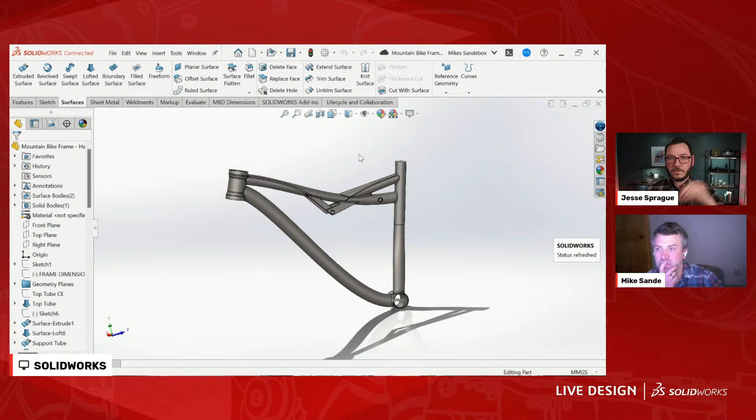Especially with surfacing, right? I think, and maybe this is how you ended up going down this path, but I think people are initially scared of surfacing because it sounds so much different than what you're normally doing. It was always one of my favorite topics to teach about though, because it's like it lets you speak the language of SolidWorks. But with that complexity, that ability to get into the nitty gritties, you have to be a little more intentional. And maybe that's how you got to where you're going today, but having a good plan coming in I think is extra important when you get into complex stuff like this.

Totally. And I think one thing I was thinking about is, have you ever designed something a little bit more complex than you're used to, and then decide to start over, and that second attempt is always exponentially more intelligent? Does that ring a bell? Probably every model I make, I get to the end and I'm like, man, I should have done that differently. But hindsight's 20/20, right? A lot of times, especially if you're designing something yourself, you don't necessarily know where you're going to go, and SOLIDWORKS is very good about adjusting. It's like, okay, I should have started this in a totally different manner. Yeah, totally, so we'll do that today. And this is what I've got up here is a frame.

I did this, man, I don't even know, years and years ago. We can look at the feature properties, 2017. So this is an old model. It's when I had a lot more time to spend in CAD.

This is actually, we were just talking about it, ordering things and watching videos. I had bought a new bike frame to build, and while I was waiting for my frame to come, to be excited about it, I decided to design that frame. The problem is, this is not specific to the bike industry, but when a bike is designed, they design around a lot of constraints.

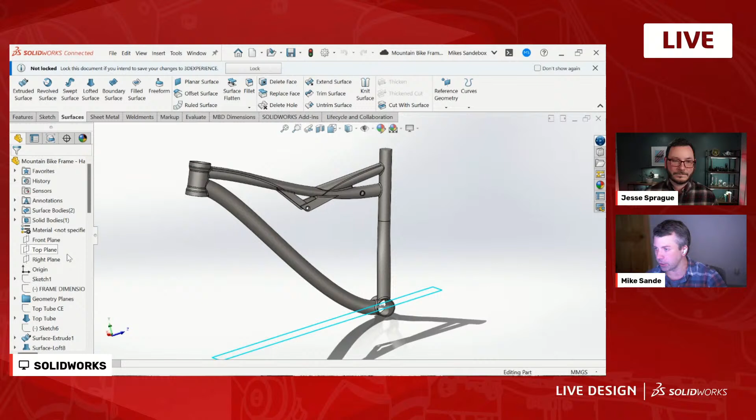Specifically, I'll pull up an example of a spec here. You have the fit of a bike, and the fit of a bike is what makes or breaks a different type of bike. So a road bike versus a downhill mountain bike versus a BMX bike, obviously they all look different. But even if you look in mountain bikes, for instance, which is what I do a lot of mountain biking, they all have tweaks to their geometry.

Let me grab some reference images. So a cross country race bike is going to have a couple angles different on just how the fork is positioned, and that 2, 3, 4 degrees difference there, they call that slack, and that's going to modify how the bike rides. So what you'll see in this industry is they'll take a bike frame, they'll design it for cross country racing, but then they'll want to have an option for people who are more into leisure trail riding or do more downhill, and they'll add slack to it, a little more travel in the suspension.

So they need to have a model that's super intelligent that can abide by these changes. So let's just kind of look at what the geometry is, and I'll open this up. They spec these things, and when you buy a bike and you're comparing them, you'll spend a lot of time just looking at what these properties are.

So like the slack angle, right? You've got these, just some of the basic specs. Let's see, I can't really move around. Yeah, so reach, stack, seat tube, head angle, seat angle, head tube, chainstay, wheelbase, standover. All of these dimensions are critical dimensions when designing a bike. Yeah, it's pretty complicated.

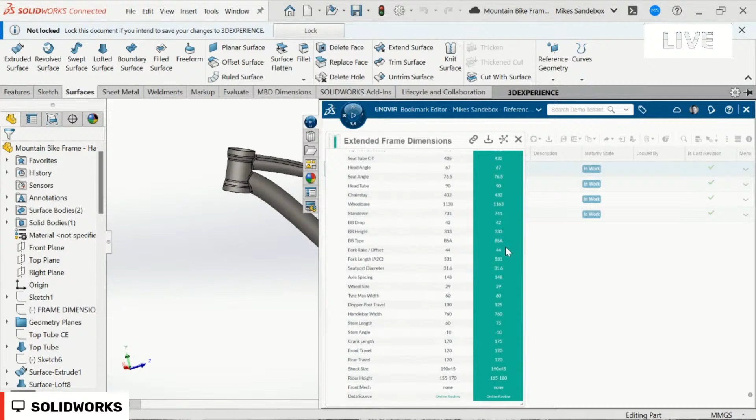So is that mostly just for like riding? I actually don't know that much about frame design, but I've always been kind of curious about it. Is that just like for riding dynamics, like with the motorcycle and stuff?

It's the same kind of idea, right? You've got different rake angles and things like that that kind of define what the bike is for. I would assume that's pretty much exactly the same here.

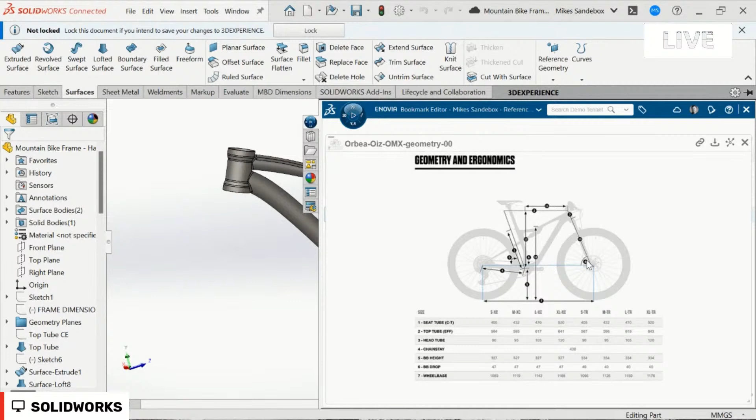Yeah, so a cross country bike's going to have less slack in the front head tube, which is this angle here. The reason is, as I'm racing, I want the most efficiency I can get, and I get to a hill to climb. If I have a really slack front, or a shallow front angle so it's more extended out, I'm going to be pedaling into my suspension. Even if you can lock it out, you still have a little bit of give, so you're losing energy as you do that.

So they'll modify that angle. The distance between where the crank position is, where you pedal, to where you're seated, that's going to change. Like a beach goer or a cruiser bike, the crank is way out front because you're sitting back, and it works different muscles. Generally, people riding those don't have the physique of an XC World Cup racer, right? They're not as strong in the hamstrings as they are in the quads.

So bike designers, of course, they're all designed around, all right, who's the rider? What's the intention? How do we get the most comfortable ride or the most efficient ride out of the geometry tweaks? So again, when they're designing these, you need to have those all in mind, which comes into the design intent. So going back to this one, I'll show you an example of what most of us, I'm pretty sure every SolidWorks user has run across, is like, hey, I created this really cool bike.

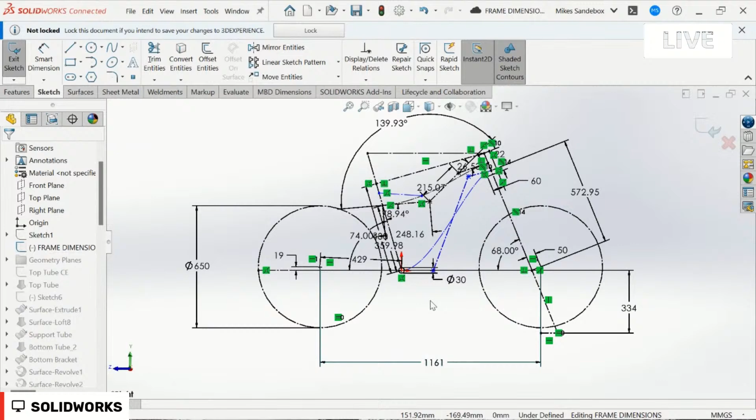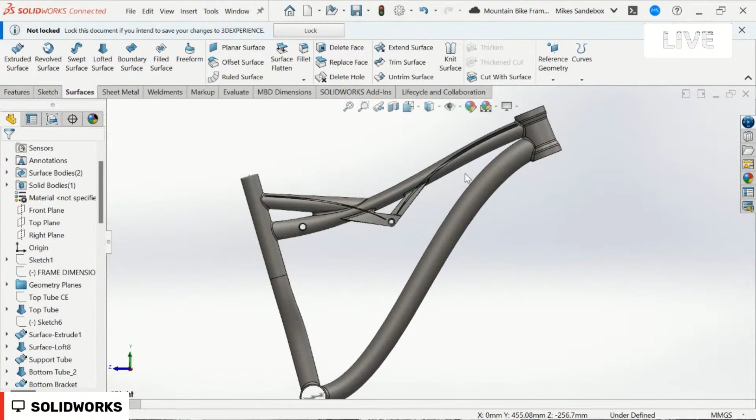What I did here, let's take a look at the sketch - this is kind of the master sketch. This drives everything, and that was my goal. Here's the 650 wheel, you can see the wheelbase - these are all pulled from the manufacturer's specs online, you can get these dimensions. I've got this style spline, we'll talk about this in a bit. What I wanted to do is say, let's tweak it, let's see if we can pull this out a little bit. Maybe that's the modification, and obviously when we exit, we want it to update. Great, that actually worked.

Maybe not as manufacturable, I don't know - we could dive in and talk more about that. And the example I wanted to give is actually to break this thing, so let's make a bigger change. Like changing the seat tube - we change that seat tube angle to be a little bit steeper. And there we go, that's the area we're probably all familiar with.

And quite the list too - a lot of fillets. Fillets are usually easy to repair. Split lines, this was cosmetic, but it's not the frame that I was looking for.

Going back to it, my intention was to create a large size frame and then modify the dimensions so I could create an extra small, a medium, a large, an extra large. And on top of that, make tweaks - if we're going to prototype this thing, go ride it and say that head angle is too steep, we don't want to have to start from the beginning in CAD.

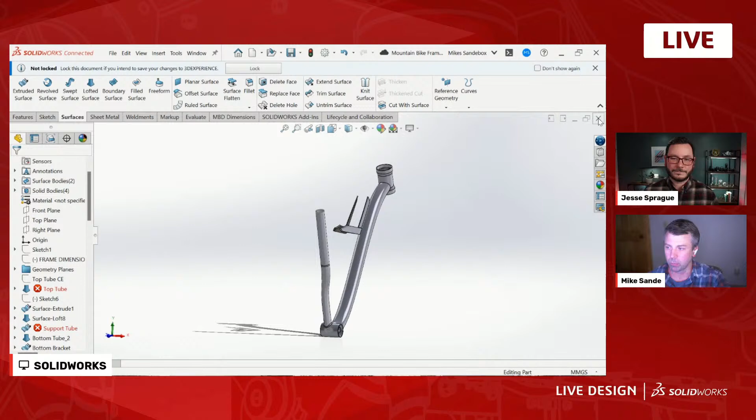Does that all make sense? Yeah, definitely. I think it's one of those things where if you think about things ahead of time - every model I go through, I get to the end and realize I should have done things differently to make my life easier. But there are definitely things, even when you're not sure where you're going, that you can think about ahead of time that will drive how you set things up, or allow you to set things up in a way that makes more sense. I always encourage people to do that - think ahead and see if there's something that will make your life easier, because there probably is in any scenario. It's worth taking that 10-30 seconds before sitting down and digging in.

It will probably save you hours if you just think about what it is you're actually trying to do here. It's hard to predict changes, but when you're in industry working more through a company, you'll get a better feel for what changes might occur. The bike frame example is like, hey, we need more slack on the front fork, so change that head tube.

So yeah, you'll be able to better understand what to expect, but that's not always the case. So really sitting down when you have a design project ahead of you - write out what are the risks your model might entail as this is going, what kind of design changes do you want to design for to build intelligence. Start with a basic model, even a scrap model - if I build this and this and this changes, does it blow up? You can use that as a baseline.

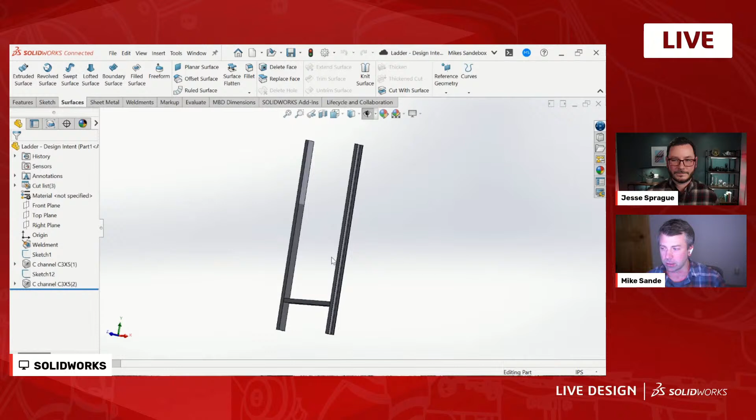A pattern, if we want to go from 8 to 6. One example I used to show, this was around 2015 or 2016, was the old ladder. Someone has a ladder, and there might be a change, or most likely we're going to have different products that come out with different ladder numbers. You'll see that I've got some design intent already built in.

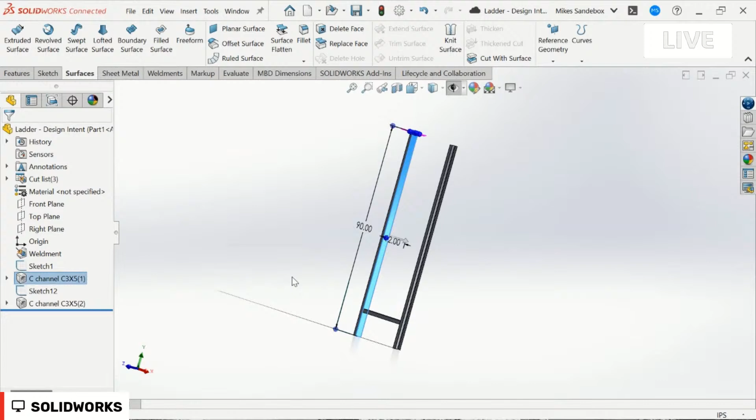This bottom rung is 12 inches from the base. We don't need to have it any smaller. We could probably go a little bit higher, depends on who you talk to, but 12 inches is a pretty good spot for that.

So like I was mentioning, we can go into features and create that linear pattern. This was brought in around 2016, where we can do up to a reference. Otherwise, this used to be something you'd have to create a bunch of global dimensions, name them, do some math inside here. This is really cool, an easy way to include some design intent.

So I'm going to create that vertex. I'll give this maybe an offset, since we also want that 12 inches from the other end. We'll space these at 12 inches.

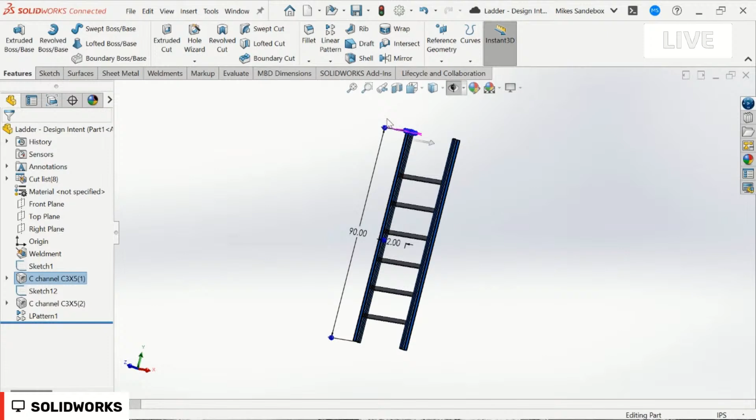So if I come back, let me just extend this out, and there's a request for a really long ladder, we can pull it. We see the design intent here is like, hey, I want a master model that can create any length of ladder. Super easy thing to model. I know we're going to get into much more complex examples, but I think that illustrates a great way to build in design intent into your designs.

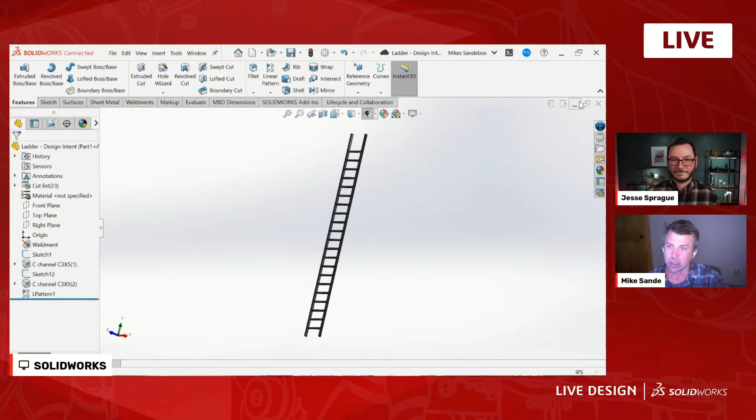Yeah, and I think design intent itself can be a little bit vague. Sometimes it's hard to explain what that means to somebody, because it can really impact any part of your model. It can be in your sketching or a part of a feature like you just showed, but it's really a mindset more than anything. It's just like, where can I take advantage of the tools that the software has to make it do what I want it to do?

Yeah, totally. Another area too is just using equations. So here what I've set up is that this thickness is just set to 0.2, and this is probably now that I look at it a bad example, but you can drive equations. If I double click here, we see all I do is enter the equal symbol.

You can click or manually select the nomenclature. If you're new to these, it's kind of worth learning. It's just the order D1, so for the first dimension on whatever sketch. This was the 6th sketch, I must have done a couple more. So a fresh new part, sketch 1, sketch 2, sketch 3 as you create them, and it just keeps numbering. That's all it is, just the first dimension that I added at the 6th sketch I created.

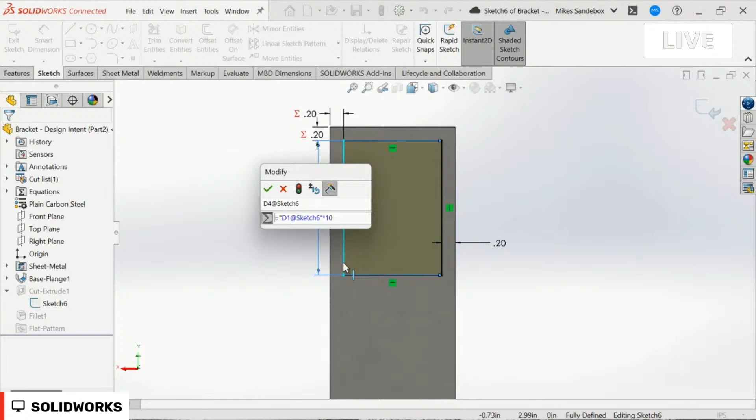So I guess I created a couple more for the basic extrude, but you can set those equal, and you'll notice I just have a multiplier of 10. Again, this is just for an example here. So if we go to 0.3, you'll see that's going to drive this length, and it also drives these other dimensions. So again, some design intent here, just into a single sketch.

And another cool one here is linking to global variables in sheet metal. Whenever you create a sheet metal part, thickness is automatically defined. Notice this radius here, it's at 0.13, 0.125, looking at the lower right there. If I come back into my base flange, we'll edit this feature and we'll override these.

We'll go to like a 1/2 inch or a 1/4 inch, whatever. 0.25. And click OK. That goes.

And then you'll see now we have... hey, that didn't update. Might be because I overrid it. That link to thickness can modify it too. So again, just ways to be aware of what might change down the road.

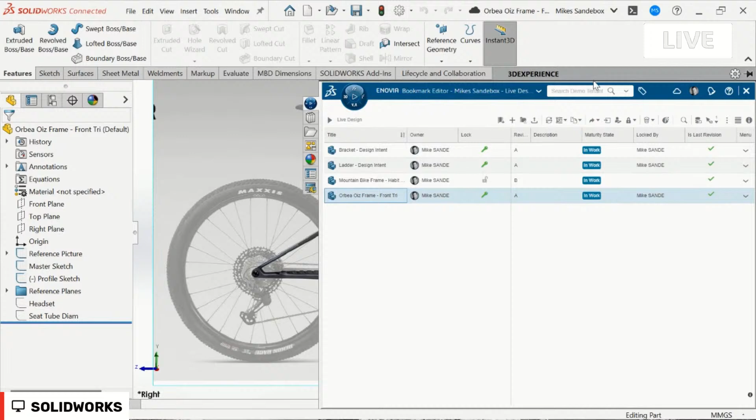Have a plan, really. I like those couple examples too, because I think sometimes people have a tendency, myself included, when working through these things, to say I don't have time for this, I'll just punch in a number. But those couple examples are literally point and click. It barely takes any more time to set up that equation or link to a global variable than it might be faster even than typing in a value. So it's not something that's got to drag down your workflow to try to work all that smarts into it. It's almost comparable in time sometimes.

Yeah, totally. Spot on. All right, let's see. Anything come from the chat?

I see we've got Eric making fun of me for my 10-30 seconds, which he reduced to 1/3, which is a funny joke. I meant 10 to 30 seconds, it was a range of time, Eric. Thank you very much. Hi Eric, good to see you as always. I like that. I saw Joy is on the call as well. I always get nervous when Joy's on the call because she's an expert in all things. It's like, got to watch my words. That's why we love Joy.

Cool, so yeah, thanks for joining as we go along. If you guys have questions, or even more so, there's a lot of experts in the chat, share your experiences. I'm by no means... I don't work in this industry, I work in the CAD industry, I don't work in the bike industry. I've spent a lot of time with bike manufacturers, helping them out and learning from them. But yeah, share your experiences and my points, because it's super important that we take that opportunity.

All right, should we try to design a bike frame? Let's do it. So disclaimer, I was going to redo the old frame that I've already done once, because when you do a model again it's always better and more robust. And then I decided it'd be more fun to do a bike that I want, and I started doing this. I'm like, this is a little bit more complicated. So I actually have not gone through this other than to where I'm at today, so we'll be doing this together. I make no promises, this may not go well, but hey, that's live design, right? This is the life we live.

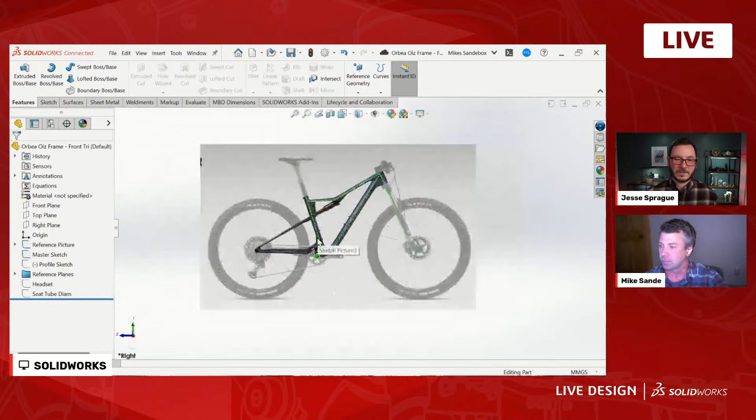Honestly, I think that was my favorite class to teach, because surfacing is one of those things that people get nervous about, but I always tell people, just open up the surfacing tab and look at it. You'll recognize more of the tools than you won't recognize, right? That first bank of tools are all the same thing, you're just working on faces instead of full features or whatever.

And I always like the analogy of, you're speaking the language of SolidWorks. When you're doing surfacing, you're just doing what it's normally automating for you. It's like writing a sentence with words, and surfacing would be like using the alphabet to spell, you have a finer... You and I are terrible spellers, so maybe that's not a good analogy, but it breaks down somewhere.

It's left to right, just like everything else—most commonly used things to the least commonly used things in the command manager. Once I realized that's how SolidWorks is set up, I figured I'd always start on the left side if it's new to me, since those are probably the tools I need to figure out first.

So all I did here, I created a sketch picture. It's just insert sketch, use its tools, sketch picture, and then get that to size.

Even though this is from the manufacturer's website, in production environments this would come from ID. This is going to be a hand sketch that the industrial design department comes in and slaps over. Engineering is going to have some baseline dimensions to start working from, whether it's an existing frame or feedback from a mule—their prototype version out there with pro riders. They'll kind of have a start.

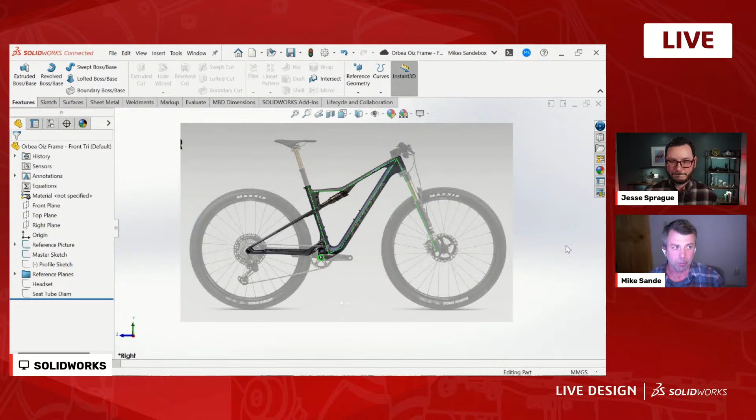So I'm not cheating here by having this image. It would generally come from ID if it's a completely net new product line or part number. Once I have this in here, and again it's been scaled to size, this is really where, when we talk about setting up the model and being smart with it, you spend a lot of time on that master sketch.

So what I've basically done is used somewhat of a center line. It's not a true center line—this here is really based on some of the geometry conditions, like there's a kind of hard edge on this particular frame. I want to make sure I'm meeting that when I start creating the surface geometry.

I actually spent a lot of time looking at the geometry and trying to figure out how I'm going to go about this—where do I want to start? Simple, I always start with simple areas, and then where do I want to have the more complicated sections at the end of my tree. That's a lot of where the frame is meeting up with other parts.

So for this front triangle, it really consists of a couple key things. Down here, this is the bottom bracket—this is the bearing housing where your crank goes through, and all your power is transmitted. That's super important, and that's where I put it right at the origin. Everything around the bike design is going to be based on that.

The other thing you'll notice is that I have a line here to accommodate the position and angle of the headset—this is where your handlebars go. Again, that design there is critical. It depends on how much reach there's going to be, how high it is, how much slack is in the geometry.

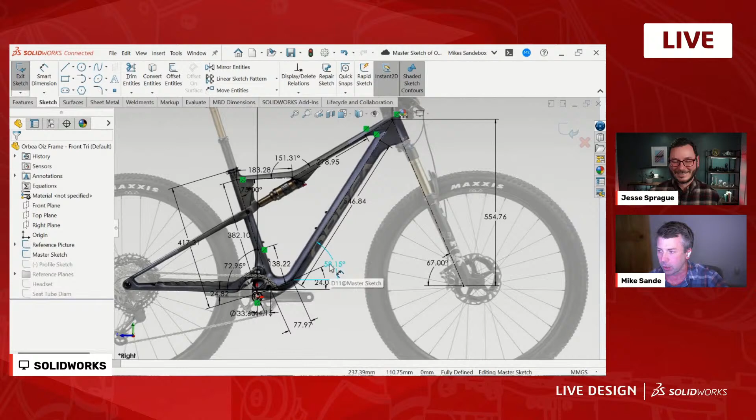Not to be that extreme, but so in here you start to lay these out, and really what I'm looking at are what dimensions I'm going to modify and change. You'll notice this thing is fully defined. I do want to make sure it's fully defined, but that doesn't always mean just slapping a dimension on everything until it's black.

I think a great example is if we start to play with my plan - what if the positioning of the rear suspension changes, maybe we go to 140 millimeters of travel versus 100, or 160 versus 140, or 120, whatever it is. They want to extend that suspension up. Can I adjust that without having any problems?

And here we see that probably would be bad, because all of a sudden we're moving where the head tube position actually is, and we want that set to this 143 dimension. So it's moving it down - not ideal.

So that's like, all right, cool - let's kill a dimension that's maybe driving that and redimension this angle accordingly. Here's a nice little trick - grab my dimension tool, and I can actually set an angle by selecting the line and then the vertex, and you get this little triad that pops up. Love that. I'm going to set that here - 30.7 or whatever. I'm not worried about those values right now.

So then come back and test it - does this give you better behavior? It's looking better. It's still got some movement, but it's not as dramatic, right? So it's kind of just spending a lot of time in 2D, especially if it's a master sketch that's driving the intelligence.

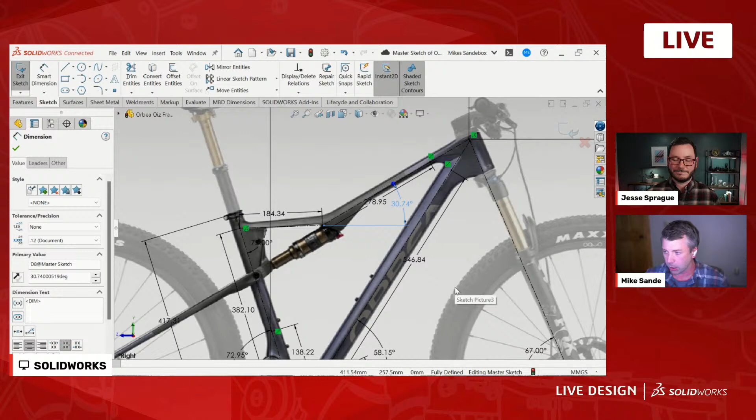So you spend a good chunk of time here, really looking at the likelihood of a seat tube change. This is probably one I've got to work on as well, because that whole thing is shifting, so I'll probably come back and refine and look at the dimensions.

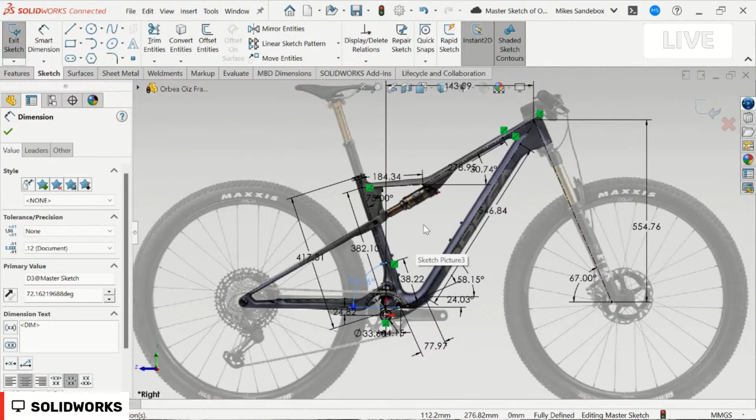I like your concept of, if it's black, it's fully defined. Yes, it is, but it may not be defined the way you want it to be. Just putting a dimension on it doesn't mean it's going to do what you want it to do. I like that concept - yeah, it's super important.

So spend good time here right up front on that 2D model, moving stuff around. If it doesn't look good, make the change. I'm going to leave it as here since we're stuck on time and keep moving forward, but you can see right away I'm setting myself up to probably not be successful if my goal is to refine these things. Maybe in this model, if we put a little more seat tube angle to it, that's fine to tilt it up - maybe there are some allowances there. Those will really come down to your design intent.

Another thing I do too that I use a lot is being able to color sketches. It's kind of just an easy thing to stay organized, but setting up sketch color, you can just right click on the sketch itself, goes into here. I did something bright for live design, but I do this personally to give that contrast. It looks really nice.

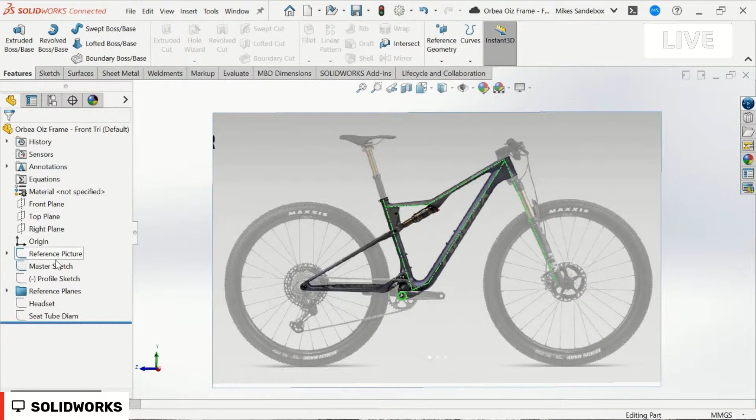All right, so we have kind of this master sketch, and again, I'm going to try to leverage and always focus on the master sketch when I create features. Now, what I did in this model that's a little additional is I've created the master, and then I've gone through and started to create this profile sketch. What you can see here is really this is going to help me determine where and how thick some of these tube components are from the profile.

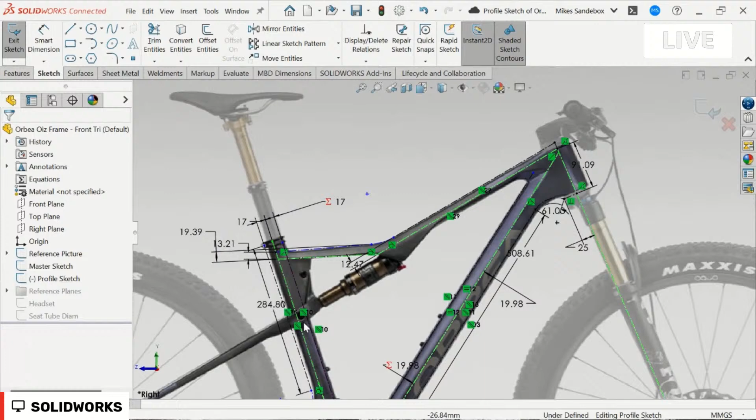Some of these are definitely like we know the values. The seat tube diameter, the outer diameter, is 34 millimeters at 31.8 millimeters ID. So I set those, and here's an equation, right? Both sides are equal. But just kind of giving me a reference based on that. A lot of these other ones, 19.98. So this is kind of a true center line. I've just got those tied. You could also just mirror that over, but for the sake of just creating this kind of outline, and you'll see where that comes into play.

On the top one here, I only created the top profile. It's not fully defined. Not a big deal. I'm using this as purely reference, and if I use it for anything, I'll make sure that I go back and fully define this accordingly. So yeah, this is just something I've added to this workflow, is like, all right, well, I'm creating some sketches, I might as well build it out.

So when we look at it without the image, let's just do, I'll show those in a sec. We'll hide the reference picture. Let's show the profile sketch. And here we can start to see, all right, here's the geometry. This is what we're going for. It looks pretty good.

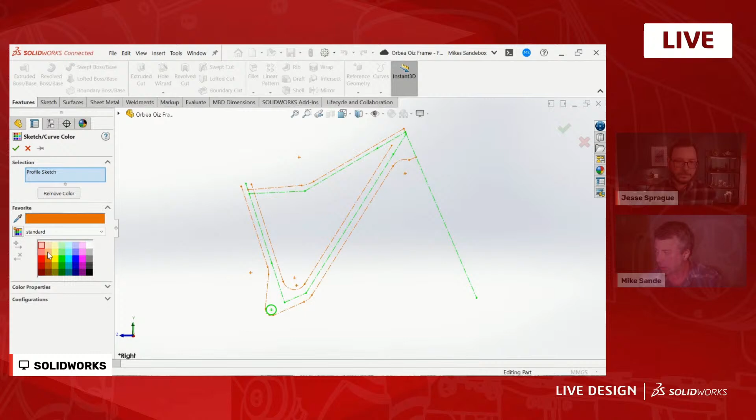Yeah, and that's a great point too. It's okay to pencil things in sometimes, right? If you're not sure about exactly what it's going to do, you can pencil things in. Just go back and lock it down if you're going to use it. At some point, define it. Make sure you're defining the things that need to be defined. But it's okay to be a little bit fluid as you go through a process. And if you're doing something that's just kind of there for a visual reference, use those sketch colors and say like, hey, don't use this at all. If you're going to end up using this for something, we need to make sure there's more intelligence. So you can kind of flag it with those colors, which is, to me, a nice visual cue.

That's a great point. All right, so we kind of have the layout done to it. Again, probably not going to get me to my desired result. I'm going to go back and I want to finish this model and make it super intelligent. Just not going to happen in the next, what do we got, half hour.

So then once we get this section here, it really comes into setting up where we're going to create the cross sections of each element. There's a few spots that are super simple: creating the revolve around where the headset's going to go, creating the diameter where the seat tube's going to go, and also the other one is going to be the bore of where the bottom bracket goes.

The reason that these are simple, this is industry standard, kind of. Most mountain bikes are going to have a pretty much set bearing size and type of headset. There's a bunch of, historically speaking, there's been a bunch that have come out. Road bikes, mountain bikes, all have different ones.

For the most part, when speccing this, we know what kind of headset we're going to get—seat tube 31.8 or 30.6, there's basically two standard diameters, and I think everyone is at that 31.8 or whatever. Bottom bracket is the same thing. So I start there and begin creating that profile, and we'll start to create those sketches.

But the next spot I want to hit is the reference planes. To start defining the easy spots like the seat tube and head tube, we'll add those in a sec. I also want start and end profiles for each tubing element—we'll create one here, one here, one here. Once we have the three main forms of the triangle plus the headset spot, we'll come back and refine the joints, because that's where about 80% of the work really comes into play.

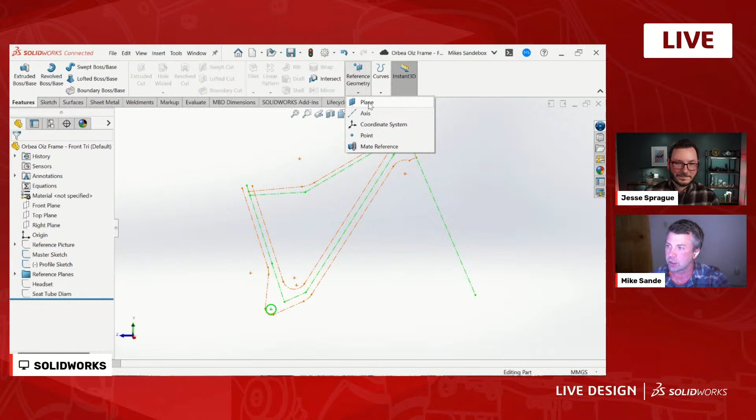When you create reference geometry, I always want these based on that master sketch. You'll notice I've added in a couple little nodes, like here—let me go back and show you a little better. And you did that with split entities? Yeah. In fact this one could be moved a little more, to where we're going to have a little more complexity in it.

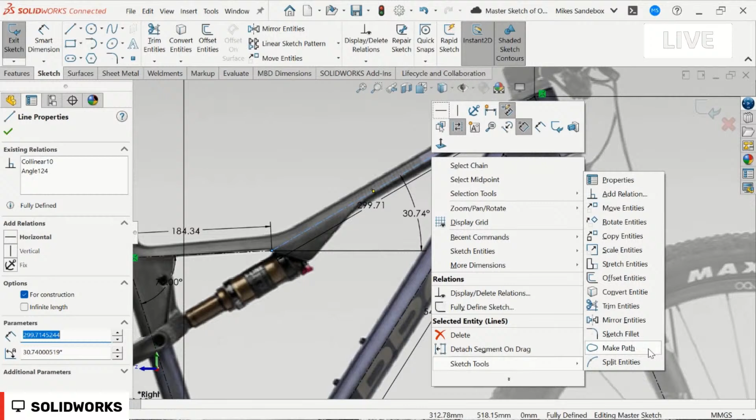So if you sketch something out, instead of adding a line or resizing it, you can come into the sketch tools—I get it from the right click menu—and near the bottom there's split entities. So split entities, and you can just pop that in. That one's really nice, and I'll show you another one with style splines as well as we get there.

So I've added that in here, and the reason is that gives me where I want to create some reference planes. What I can do is select on my line, select on my point, and right away that creates a perfect normal-to plane on that line. What's great is as we modify that master sketch, that plane always stays right there, normal to it.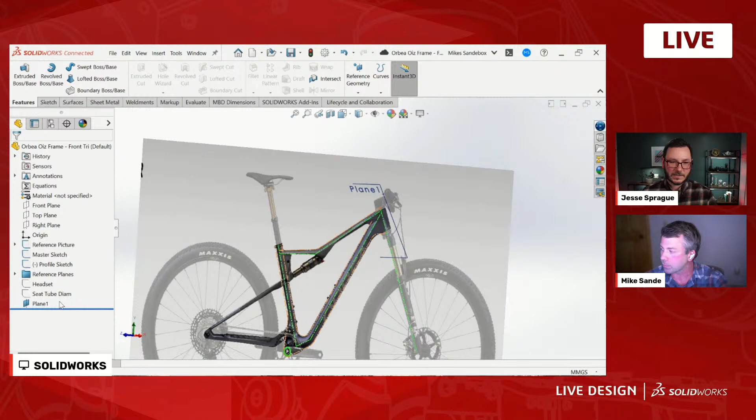It's also nice that when we go through and look at this plane and create a sketch on it, that little coordinate system pops in there nicely parked right where it's defined. So I know where that relation, the 0,0 point for that sketch, is going to be based on that master sketch. That's a great tip—you wouldn't suspect you could do that unless somebody told you. It's a really easy way to control especially the normal direction of a plane.

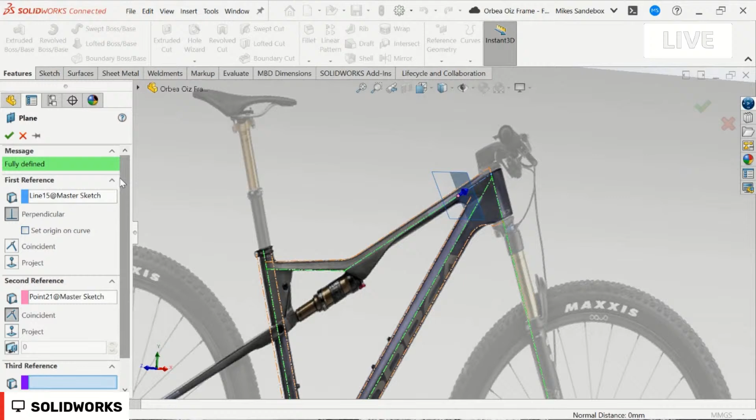I did learn this going back—the size of the plane created has some sort of equation based on the dimension, so this one's a lot smaller, the length of the line in this case, which I thought was interesting. Then once you set up your planes, you can flip normal—you can flip the normal around on these. That's basically the default it considers normal when it goes to the view and how it's sketching. So whoever knows why that was added, put it in the chat—I don't remember.

2019, that'd be my guess. I don't know, that's my guess. All right, somebody drop it in the chat to correct us. Flip normal, when was that added?

All right, go through and set them up. You can size these too, so obviously sizing the plane so it's not a complete disaster. And then naming, I name everything, I try to name everything. Good habit, so getting these named, giving it like, what is the down tube top, down tube bottom? This is the top of the down tube, this is the bottom of the down tube, seat tube as well. And then you have these name references, they're easy to follow. If you're not naming things, well, you're crazy.

That's going to be the clip for this episode: if you're not naming things, you're crazy.

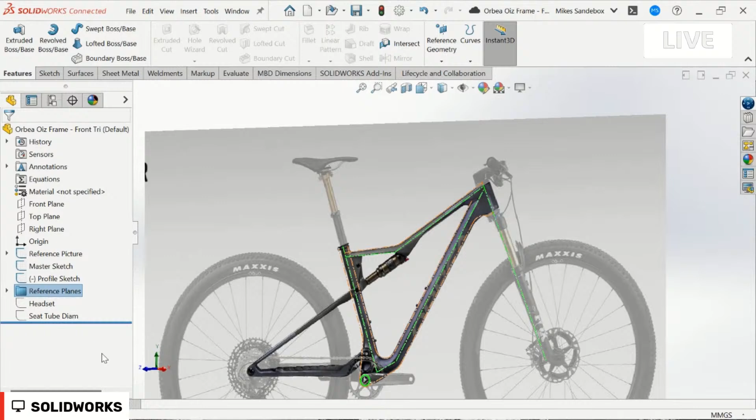We got some clarification on F8, it's the display pane, that's why that popped out when you hit it. Gotcha, you can display pane, quick access. Okay so it is working in my version, it is working properly. All right, thank you, that makes sense, that is good to know actually.

All right, so I've got a bunch of organizational things. Again, just going back, spend more time than you think on that master sketch, that initial sketch, if it's going to be the intelligence, right? And oftentimes that stacks up over time. To me, I think I often just jump in and create a sketch, fully dimension it, and move on without really questioning why and how. Totally, people who work in industry for a long time obviously know this, they practice it, they understand it. So for newer designers, the 2D sketch you create has a lot of implications. Make sure you understand them. And if you don't, go ask someone who might, or figure out, write it down. Like, what are the risks that this model might have?

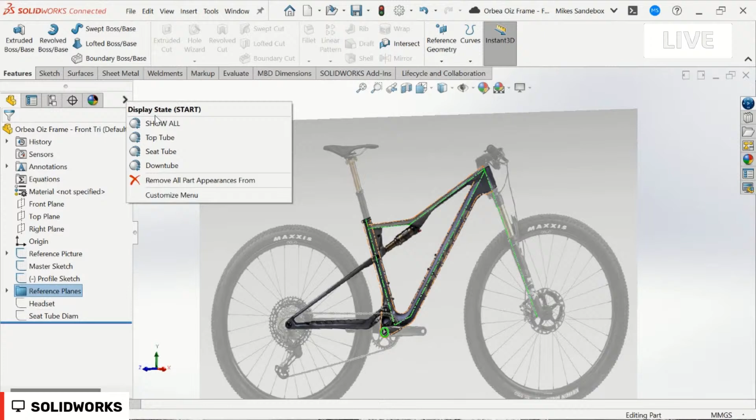And then from there, in this particular design, I start creating those reference planes to be able to build it. And then I love display states, so I'll come through and create a bunch of display states that allow me to hide and show. What I do, I actually never go to the configurations tab for this, it's a good trick. This little chevron, if you right click on it, this is where you can access your display states on the fly. So a show all brings everything in. My seat tube hides out that sketch, gives me the master and just the plane I need for it. Super handy to me.

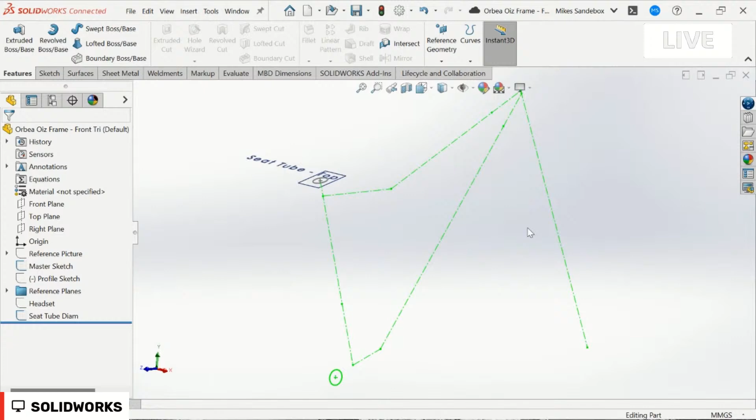Yeah, display states that are not linked to configurations. Yes, so you can link display states, I'm not using configurations yet, we essentially would, but... and these are nice for design reviews as well, using display states. So if you're hiding a bunch of stuff, you've got different appearances you want to apply to things to point out during a design review, you can create a bunch of those. Like a customer comes in, they want to see their products, just going through display states to show that is a nice way to do a presentation as well.

Yeah, that's definitely probably an underutilized tool in SolidWorks. I don't know what else people use display states for. Showing a cheese appearance versus, yep, probably, I don't know why I thought of that. Guess I'm hungry, Wisconsin's coming through.

All right, let's add some geometry. So like I said, we're going to start easy, and this is all going to be surfacing. We'll start surfacing, and eventually we'll get to some solids. If you're new to surfacing, and if you don't see it, right click and go to your tabs, and you can see all of the cool tools that are available. These are all, doesn't matter what version of SolidWorks you get, you're going to have feature sketch, surfaces, sheet metal, structure systems, and so on.

All inside of here: lifecycle and collaboration. I'm working in the new connected version of SolidWorks, saving to the cloud and managing all my revisions and content there, which is super nice because I work on multiple computers and can hand it off.

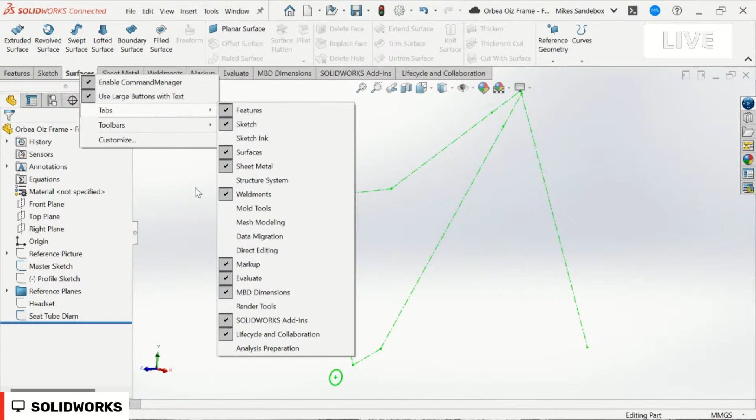I love how easy it is to pop those on and off. I'll do that on a project by project basis, swapping my command manager around to just have the tools I need there. I know you can use the scroll wheel to get across tabs, but it's nice to narrow it down to just the tools you're using, even within the phase of a model.

When I was doing a lot more CAD work, I had reg keys for kind of everything. I had a reg key for weldments, and surfacing was the big one. Simulation was another I would switch to, and then I had my default. I'd load my surfacing reg key, which would change a lot of my mouse gestures and my S key. Simulation pre-processing was a lot different too, so I'd load that reg key.

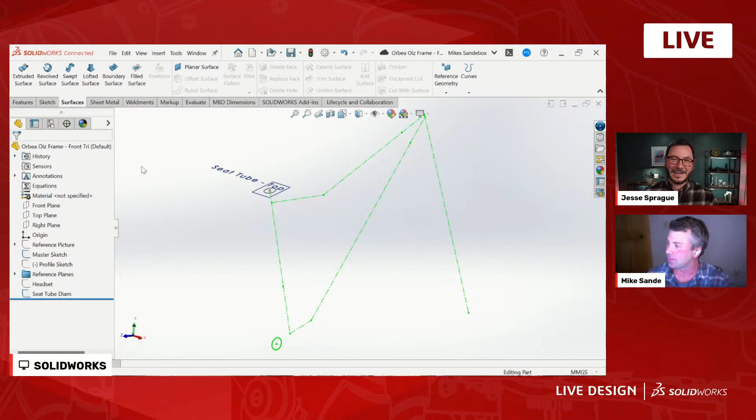That's trickier than I got, but I like your style, Sande. I think it was effective—more like, check this out, look what I got. You never did anything all day long, just calling people over to your desk, swapping reg files. I have 37 new reg system settings now. You never know what I'm going to do.

Going in, create an extrude just like you normally would with basic features. An extrude surface is just like an extrude, but it's just the outside shell, and it's infinitely thin—we can later convert those to a thicker model. Again, that's design intent. One area I think is important to learn is there are different ways to create different end conditions when you create 3D geometry. In this case, up to vertex—you don't even have to select it from the drop-down, it's smart. If I click on a point, it understands that vertex.

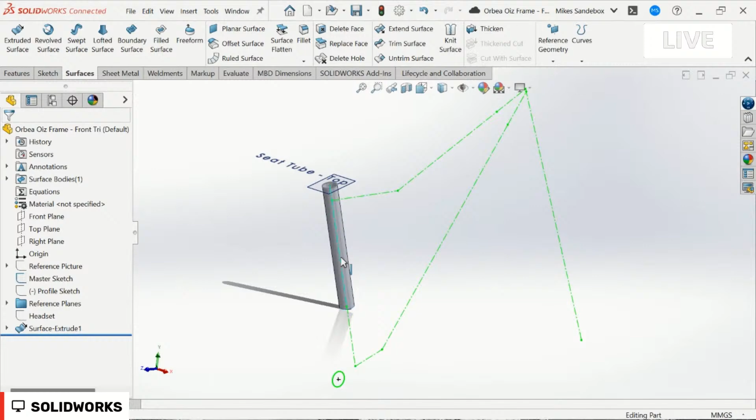Blind, up to vertex—maybe that one. Point there, master point 20 at master sketch. The goal is that if we say we don't need that set area—basically we know the max depth of this bike has to be here, so we can set it there, and now it's driven back to that master sketch. We'll click it and say this is actually going to be up to there. Good deal, exit, and it's updated.

Yep, another thing that's easier to do than blind, punching in a number directly. But if you think to do it this way, it's going to save you a lot of effort. So that's one simple one.

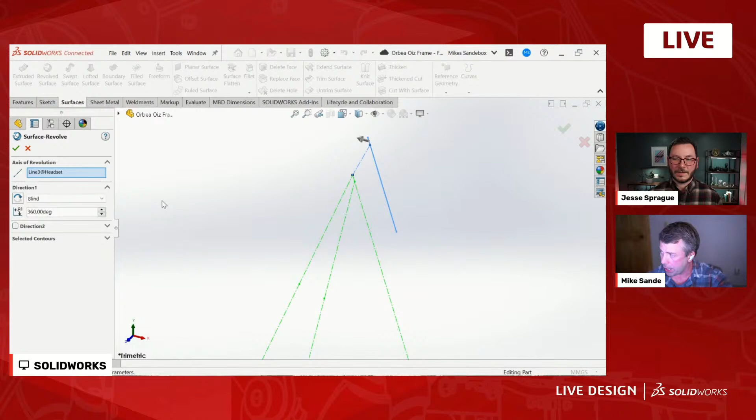Headset is another one. This morning I decided to add a little extension to the headset geometry. This was when I was playing with the failed version of the bike—I noticed as I was going through that a lot of the fillets would extend past the headset. So I thought, why not have it be larger than what I need? I can go back and modify things later to figure out what the max headset height stack should be, and cut it down later. So go big and refine it down the road, versus saying I know exactly what it is. Learned that from the first model.

Yep, so pretty quick, all right—pretty simple, we got the easy part.

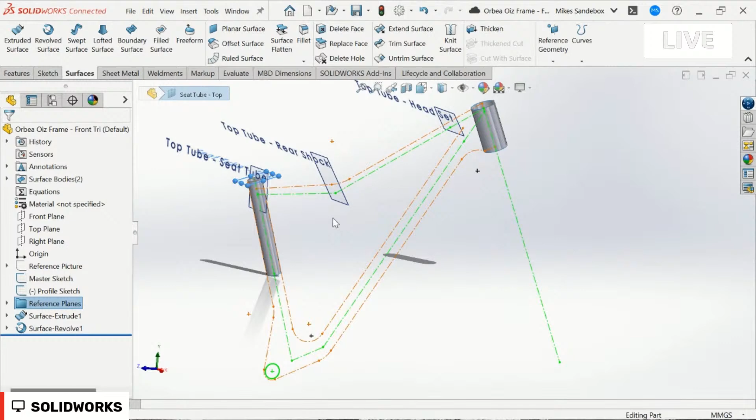Now the hard stuff, right? Okay, so let's go down to the top tube. The top tube has definitely got a little bit more to it—in fact, there are actually three elements here. Let's take a look at this reference sketch, because I want to get your opinion, Jesse.

How would you do this? Oh, actually, let's get the audience's opinion—how would you do this thing here? That lets me off the hook, I like the audience opinion better. You guys can give me ideas in the chat, get me out of a bind. I'm waiting for someone to email me a completed model of this—like, they're already finished in the time while you were jabbering on about tubes, I actually did it.

I guess they're probably 30 seconds behind us.

I try to break things down into where the consistent profiles are. In this case, the top profile basically runs from where you put that split down to where it Y's off. I think I'd be tempted to do that whole section straight down and then trim out part of the bottom where it flares for the shock. That profile across the top runs continuous, so I'd continue it all the way and just trim out the piece I needed to blend in for the shock mount.

Yeah, I like that. That's actually not where I started. My original thought was to create the whole top tube as one kind of swept surface, lofted, because we're going to have two different profiles, and then deal with it later. I was like, I'll deal with it later.

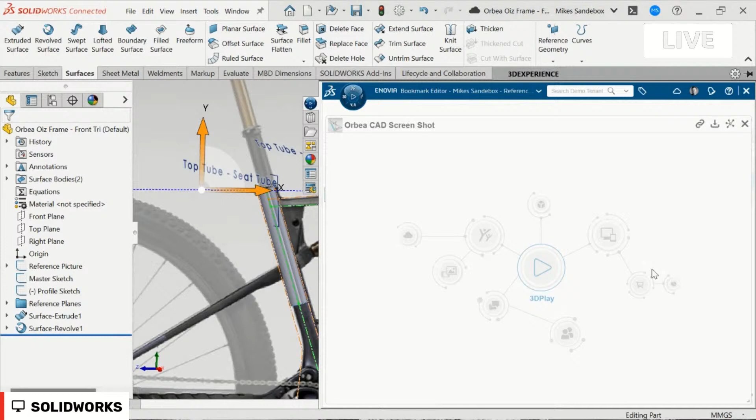And then good old internet - I'll show you this because I'm working between two bookmarks here. I did find this. This is good old off their website, and I love when companies use CAD screenshots for marketing content. It makes me feel so validated for some reason.

So this is a lot - like this, basically, I saw this and I was like, holy cow, I can probably feel better about myself because they do have a lot of tangent edges, which is great. These bikes are beautiful, by the way. If you ever get a chance to see an Orbea, they're a Spanish company. I don't know what they use for design, but I found this little cheater, and this is when I realized, because I don't have one here to design from.

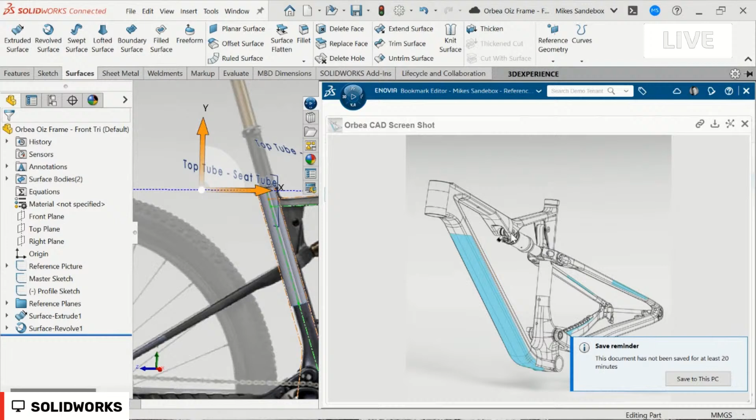If anyone wants to buy me one, I can send you the specs. So yeah, I agree - this whole top shell, this whole top piece should be my first chunk. So that's what we're gonna do, and then we'll deal with the rest later.

You're a CAD guy when you're finding pictures on the internet and spying on their tangent edges to try to figure out what they're doing. How do you guys do this?

Okay, so here's a good example of where the outer profile sketch I created is going to become super valuable. I probably need to go back and take my master sketch and this profile sketch, and make sure they work well together. Again, play with the 2D, move stuff around - does it behave like you'd expect? If so, move on. Until then, I'm going to leverage the profile sketch, and I'm probably going to do it the wrong way, but we'll talk about that as I get there.

Okay, so I'm in this top tube geometry, and we're going to create a spline. Splines have been evolved over SolidWorks over the years.

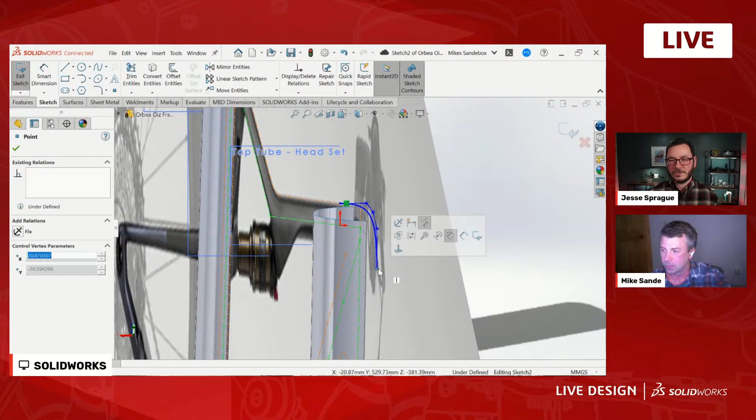For those of you that use the basic spline tool, I don't even know why we still have it, I think I wish I could just delete it. I still like it, to be honest with you. I never - for quick and dirty stuff, yeah. For anything that's actual geometry, I'll go style spline every time. But when I'm tracing something like an image, I like using regular spline. Yeah, I guess that's true - freeformy stuff, a little bit easier.

So what I've got here is I'm going to attach this point - I'm going to pierce it to that sketch. I'm going to create another one, do a converted entities from this, which probably isn't needed - I could just go back and modify this one, but for some reason I have that stuck in my head. A pierce is like a 3D coincident - if there's no end node, I can't create a coincident node, but a pierce is like threading fishing string through a hook. Good way to describe it. Yeah, so piercing that, just threading it through my endpoint.

The reason I like style spline so much is you can fully define them. It gives you these control arms, which allow me to provide some dimension. I also love having these initial and end control arms - you can set them horizontal. Let me go back because I'll show you another cool trick, another thing they brought in. That's going to let me know, in most cases, when I mirror this over - I'm only going to do half the bike because it's way faster, it's half the weight, right? Yep.

I'll mirror this all over so we have perfect symmetry. So doing that, you want to make sure that there's no ridge here.

This is carbon composite. They can build most things. There's not a lot of design constraints. There definitely are, but not like aluminum tubing where I can just make stuff up and say, go hydroform it.

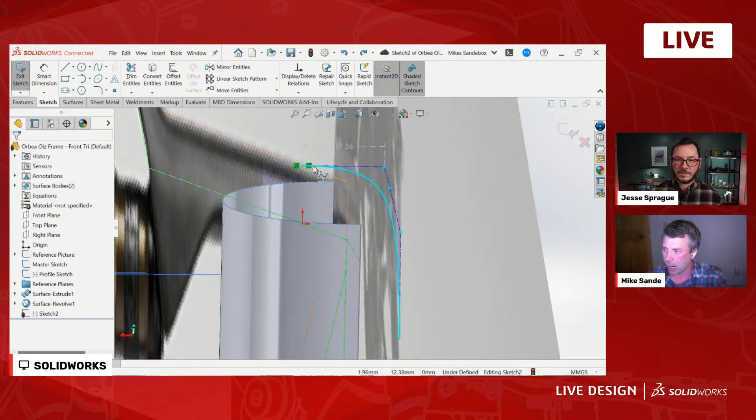I was just going to ask about that because there was a comment about thinking for manufacturing, and I was going to ask, I'm assuming this is carbon. Yeah, definitely. In the world of bikes, the big thing you've seen recently is it's a lot harder to look at a bunch of new bikes and say carbon versus aluminum. 20 years ago, super easy, constant stock tubing, butt it up with some welds, probably not carbon.

But what they're doing now is they're hydroforming a lot of these tubes into a mold, so they fill it with water. I don't know if they heat it up or what, but I think a lot of it's cold forged, and they just use hydropressure to build aluminum tubing.

Aluminum is still very prevalent. Titanium, steel is still very prevalent in the bike industry. Carbon, the nice thing with carbon is it allows designers to stiffen and soften areas of the bike where they need it to be. If you need compliance, like underneath the seat for a nicer ride on a road bike, carbon, you can do that. You can't necessarily do it as well with other materials. That's so interesting.

Like with the thickness of the carbon, they build in some give, or how does that work? Yeah, so the weave, the way that they actually do the layup, the thickness of the layup, and then the geometry cross section too. So if you look at road bikes, you may have a super thin chainstay, which is the one that goes to the back wheel, the bottom one.

But those are generally really rigid, like twisting rigidity is high. They're generally thinner because you want it to flex because that's your ride, you take some little bumps out of there. But yeah, as you're pedaling and that bike is torquing over, areas of power transmission they'll make stiff. Areas where they want flex, they can make soft and give you a better ride because you don't want something new every day.

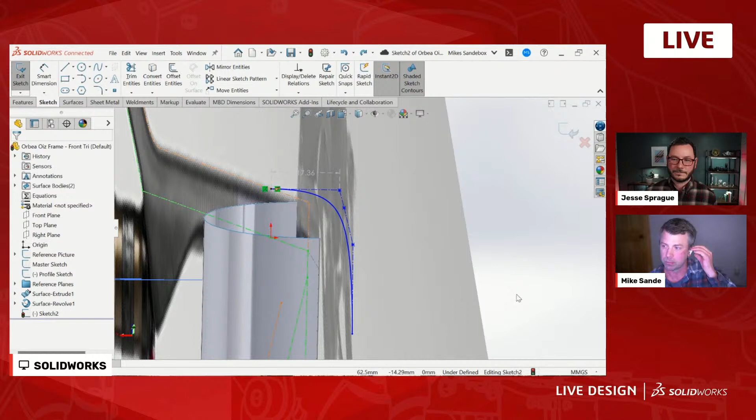Yeah, so that's why carbon's, I mean, you can make an aluminum bike super light. You can make a carbon bike lighter, but the variability of flex and stiffness is easier to work with. That's pretty cool.

All right, any bikers in the audience? I didn't even ask. If you're a biker, how did we miss that? That could be e-bike, that could be Harley rider, whatever. If you ride something with two wheels or even one. I was going to say, what about a one wheel or something? Does that count? Unicycle. Yeah, our local trail, they have unicycles that ride a 2.8-inch big fat, like 26-inch wheel. They ride awesome mountain bike trails. It's crazy, I yield to those guys there. Yeah, they're crazy.

So coming back here, I know we kind of get off topic, but it's live design, it's meant to be fun.

I'm going to kill that dimension. So one thing that's cool about this is I want to create a horizontal relation. If you didn't know, when you create these relations, they add this little highlight box to tell you what it's closest to. So if you're cockeyed or have a weird coordinate system, you can rely on that to at least give you a good start.

So if I was sideways and I thought it was vertical, and you click vertical and everything blows up, it was actually horizontal — just look at that outline. So we'll create the horizontal relationship there. We'll do a vertical one here, although we don't need it. I don't think that flare could be greater than vertical, but let's just start to shape this a little bit.

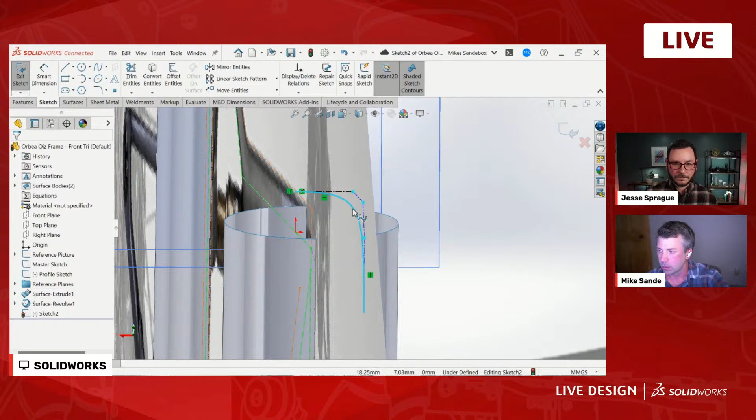So with style splines, whenever you're working with them, something to be aware of — let me go back. So I added 1, 2, 3, but this one might not be needed. You can add and remove these little control points. So if I right click here and go into... I might need help here, Jesse, because my 4K monitor doesn't let me see.

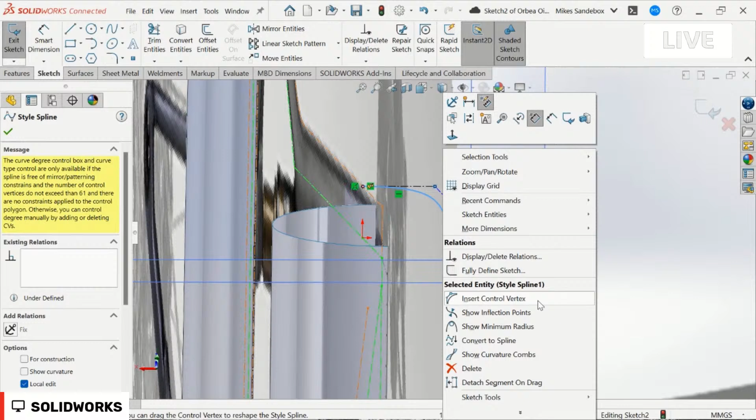It's in spline tools. You can add and remove spline points - you have to right click on the spline. If you right click on the spline itself, this is where you can insert controls, and you can also delete controls. So if there's something you don't need, you remove the controls rather than deleting the whole thing.

The other thing in here that's really nice to know is curvature combs. So I enable that. Curvature combs are basically, correct me if I'm wrong, the rate of curvature of your model - how fast it's curving. Really important when we talk about C1, C2, C3 curvatures.

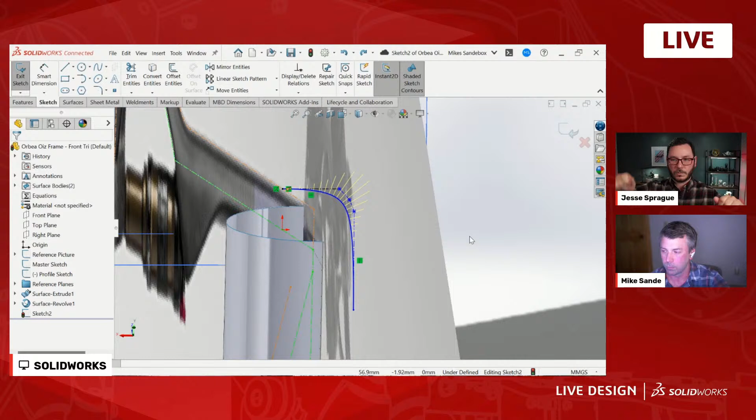Another reason I like style splines is it gets you into that C2 area where we have nice continuous combs, and I can see that visually. With a style spline this is maybe a little less helpful because you're looking at the actual cage, so you can visually see where things are going. But with a regular spline, it's really easy to get the curvature to invert, where you push one handle too far and get a dip in there - curvature combs are a great way to see that quickly. With the style spline you definitely have the advantage because you're looking at the cage, which helps visually too.

If you start playing with style splines and Jesse comes knocking on your door saying, dude, why aren't you using regular splines? I use them all the time. You can convert as well.

Great point. In general, my rule is I always use fewer points than I need, and then add them in because it's easier. That's the same thing I like about style splines - once you get a handle on those, it helps your mindset when you switch to other surfacing styles like xShape, since it's the same idea of working with that cage and interpolating the spline in between. Same idea - start with fewer loops and add in loops as you go.

Splines - fewer points, add them as you go. I think in general, start with everything simple. Start with less. Yeah, I always do the opposite, and it burns me, and I start over, and then I fix it. And then I tell myself, start simple, Mike. And then a week later, I do the same thing.

Todd says, despite all my rage, I'm still just a spline in a cage. That's pretty good.

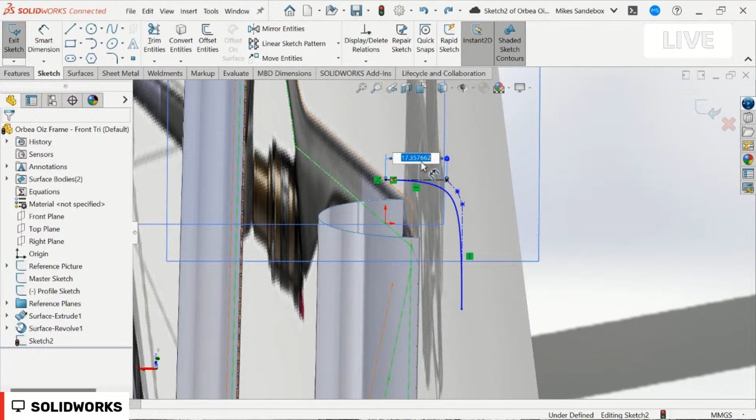Hey, 2024 feature - I don't know if anyone's out there right now, but one of my favorites is this preview dimension. This came from our xDesign app. What I discovered the other night is you can turn it on and off right from the in-context toolbar. So here, this preview sketch dimension - if it's disabled and I click on it, nothing happens. With it on, that lets me click on the value and it's defined.

And it's smart too - like if I do a control select on two, you see the angles brought in. Pretty cool, pull that out, and it'll just add. A couple of these - again, I've talked forever about the importance of not just defining to define, but we're going to do it anyways. Do as I say. I actually want this one.

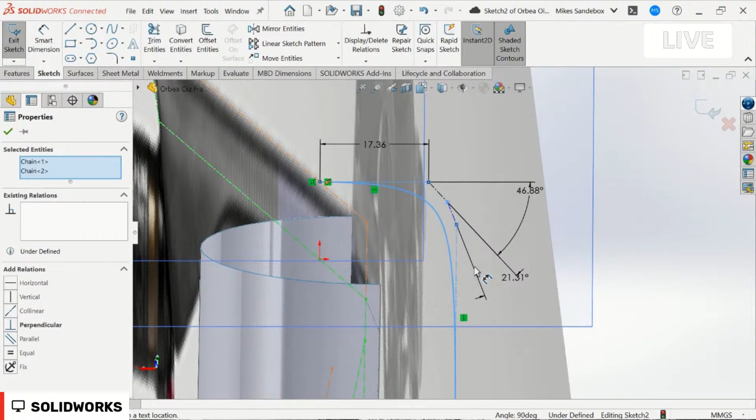Somebody said, was it Joy? I lost the comment now, but somebody said a 2-point spline is overlooked, and I agree - I use 2 points all the time. I 100% agree. All right, so we are just adding some dimensions.

This is just for the profile, which will be refined, and most likely in the real world - as we talked about, the importance of profiles is that they create different rigidities. This is a really good example of where you'd see a handoff to an analyst group, especially in composites. You get them in the frame, they come back and say, hey, torsionally this thing just isn't there in the top tube.

You can start to refine these. And that's why bikes now have more crazy geometry to them. It's not all aesthetics, it also goes back to that stiffness-to-weight ratio type thing.

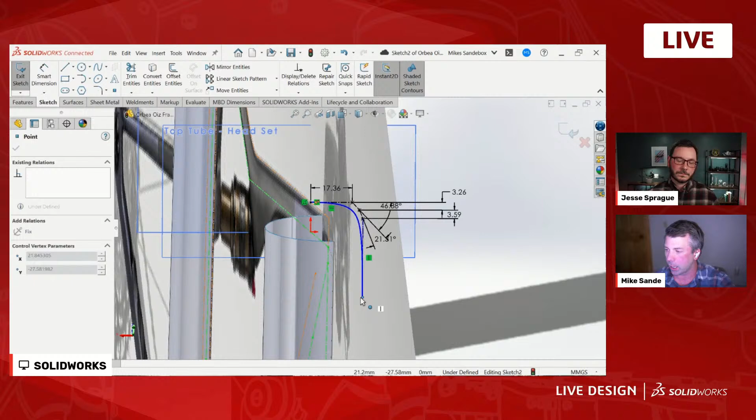That makes sense. Okay, so we're pretty close. We've got this, but I'm going to leave this dangling because as Jesse mentioned, we're going to try to accommodate this as one piece and we'll cut it out. How are we doing on time? I feel like we're getting pretty close. All right, I'll try to hustle here and just at least get some geometry besides this.

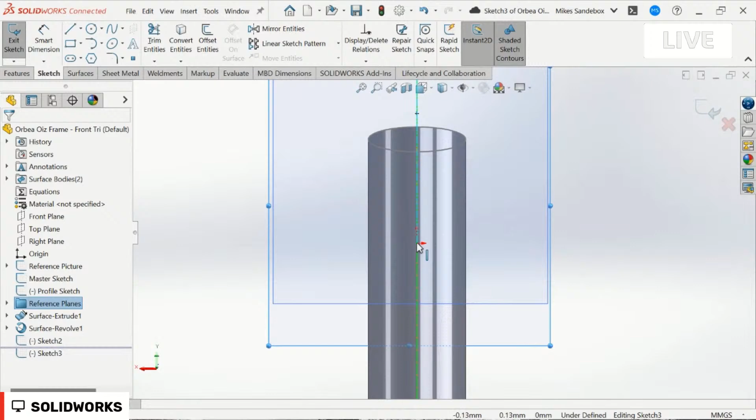So create another sketch on that - here's a great example. I have no idea where I am, but I know that's where that line intersects, so that's a nice way. One thing when I do style splines is I kind of go 1, 2, 3. I used 3 before, so let's use 3 again.

But this one here is going to be about there, and we can't have that go past. Let's see if I can dimension it to the plane - do it to the right plane. We can't go past the seat tube. Minus 3 millimeters - that's not what I wanted.

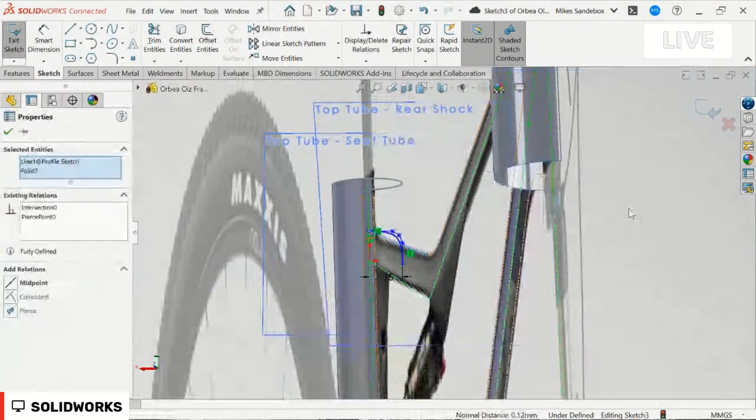Looks good, and not fully defined, but for the sake of time we'll start to come through and look at this, because I want to just do one last thing - a couple last things. We got some time, thanks for hanging with us guys.

Curious to see what you guys would think - would you just go back and convert the initial sketch after we said I wouldn't be using it? Because remember, I was going to color it red as a reminder not to use it, but now I'm using it. See, this is totally live design. Yeah, this is what happens - making decisions on the fly.

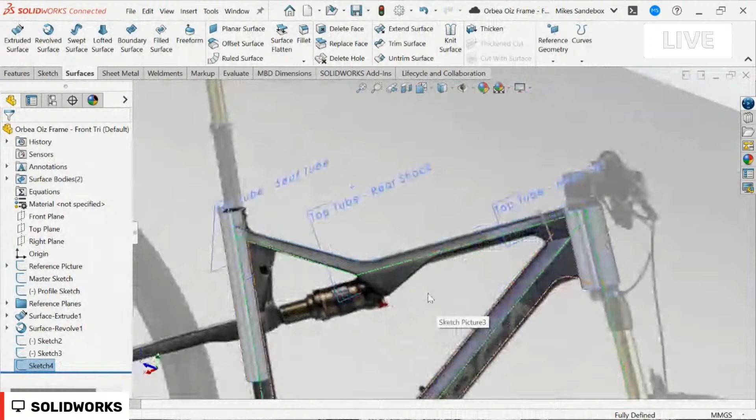The chat is getting out of hand too. I've been nominated to - are they all telling me I'm doing it wrong? No, they're okay. I was like, all morning I was thinking everyone is going to tell me I don't know what I'm doing, and I'm okay with that. I am 100% okay with that. All right, I wish Ben Lofton was here.

So we're going to create a surface loft. I think more than anywhere in SolidWorks is where I use the selection manager. Yes, I agree, isn't surfacing right? So selection manager, get to know it, it's your friend.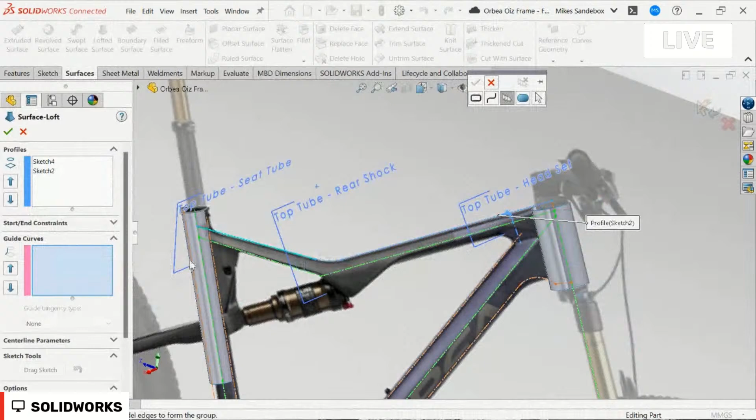It's pretty easy to figure out, but this is where you can say we want - let's go back because I don't know. We could actually just steal this, do a lofted surface. Oops, telling me that - I don't want that, I want my guide curve, selection manager. See, and then as I start to hustle, there we go. So grab all three, right?

Yep. Let me go back because I want to just point this out - selection manager would probably do here. Yeah, you're probably right, and you'll notice my mouse has the right check mark. So newer users out there, be aware of when that comes up, this could save some clicks. When I right click it, it just okays it - I don't have to go up to the check mark and it adds that group.

Yep, and then let's create the loft. That looks good, can't see, it's on the other side. And then we'll just do - look at that, seat tube. Nope, I didn't have a top tube, I thought I had a top tube. Oh well, if you don't name your stuff, you're crazy.

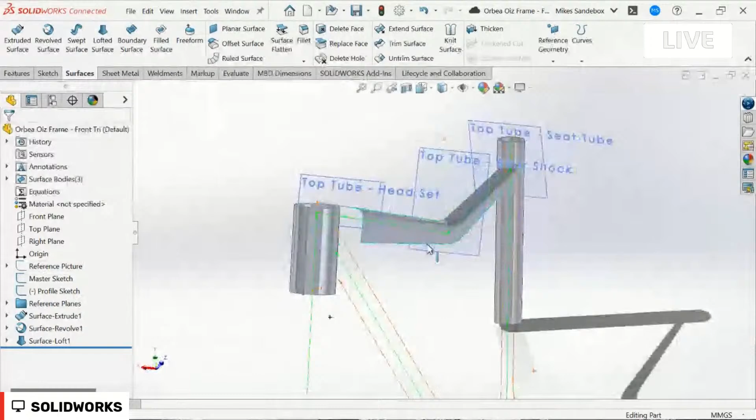Nice, immediately comes back to bite them. Nice, all right, so Jesse, I think at this point we're good. But the problem is we don't have enough overlap on that, so no big deal, I'm going to come back.

And that's why we leave this open, and I haven't defined that. We can stretch it way down because we're going to trim that later. And hey, that looks pretty good. There you go, pretty good.

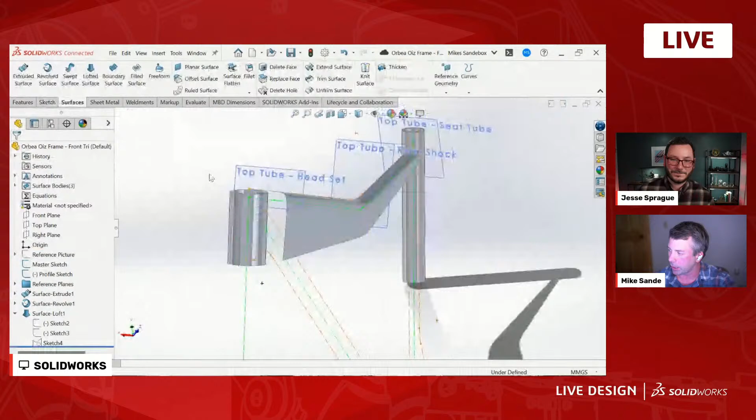Right plane will come in here, let's go ahead and turn on that reference plane. And then maybe I'll use style splines, or regular splines - just kidding, I would never do that. No, I didn't, I used style splines because I'm not crazy.

And then name your stuff, and if you use regular splines, you're crazy.

I'm just kind of Russian, but not Russian like the nationality - I'm actually Finnish primarily, if you've wondered. So this stylistic approach would be kind of iteration back and forth with an analysis group to see what we're doing.

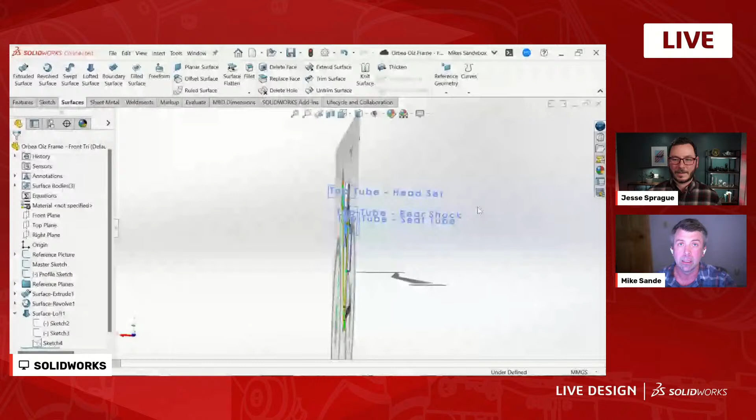It might not be for a little while, but basically what I want to do here is walk through how I finished this up. So we're going to do a trim - trim surface. You can use a sketch, you can use other surfaces, and then it's just going to remove out what I want.

Not that button. Oh yeah, I forgot it. I did not see. Okay, I'm all over the place. How about we just hide it all like that?

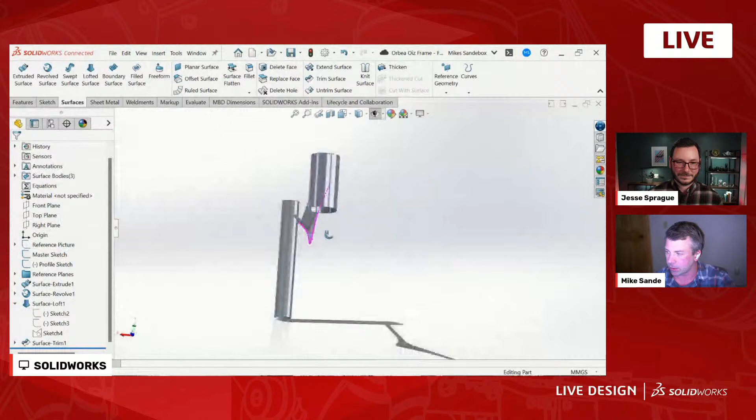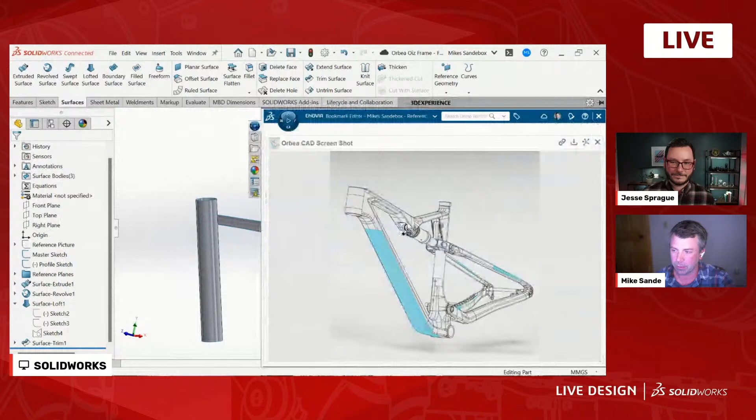So my plan of attack here would be to create this section, and then I would do another lower portion up to here. This would be one section of tubing, another would come through probably into here. I wouldn't merge those - I would thicken both sides and then merge it, because we have this weird cutout down here, so there's a lot of complexity. I think I could get away with just doing two solid bodies and then merging those.

Yeah, the down tube - this is pretty easy. And then the time is going to be spent in all of this complexity. So sorry to not get into the really crazy stuff.

But I hopefully - I have more because I want to show something I've also been playing with. But really, my design intent is to be able to have some intelligence.

If we go back to the master sketch - this is probably going to blow up - start to tweak this angle here a little bit, maybe extend out this geometry. And I'm using, if you guys are aware, Instant 2D.

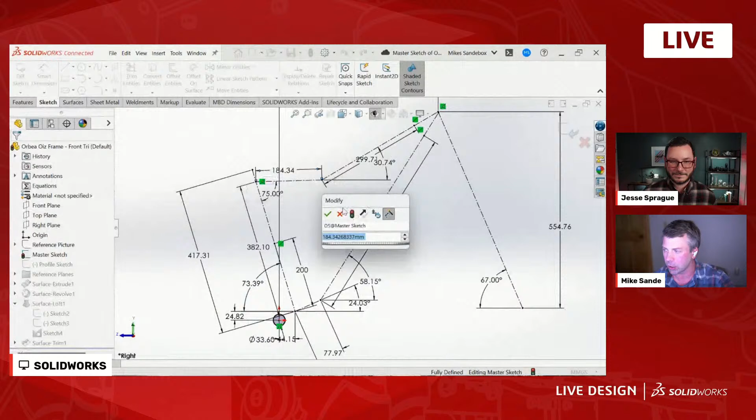If you ever get it where you're trying to do something and it doesn't want to come up, it's most likely because you have that on or off. Like now I click on this and it doesn't give me the option to select the value - I have to double click to get to this. Does that make sense? Sometimes people complain about this behavior, like oh usually when I double click this dimension value comes up - yep, that's probably because Instant 2D may be on or off.

I like working with it, but I also like knowing it can toggle. I'll stretch that out, click OK, and then we have a nice rebuild. So test it too - go back and test your assumptions very early.

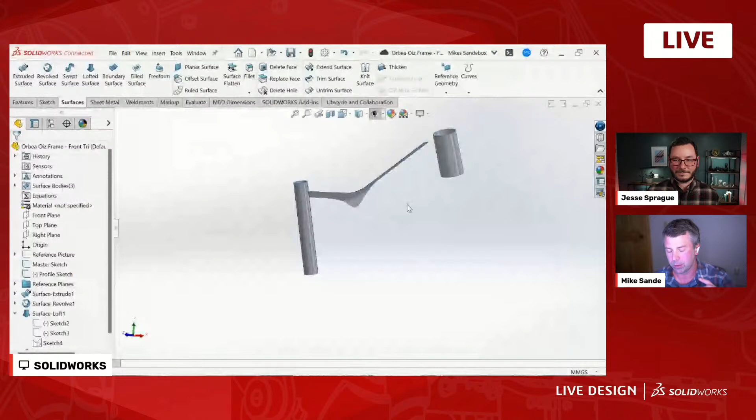Can I make a change? I would save it before you do that, because you can just reload versus Control Z, which is a lot of times a little bit easier. But I'm fine with that.

Eventually, over time, I'll build the top tube as a separate body completely, and the down tube - the one that goes down, better with the visual - I would build separately. Then once we have all of the main components, you come through and start to refine what those transitions look like. It's just going to be using a series of extrudes, swept surfaces, boundary, and filled surface.

And if you're not familiar with these ones, they're really powerful. You can play with them, and they're relatively easy to use once you play with them.

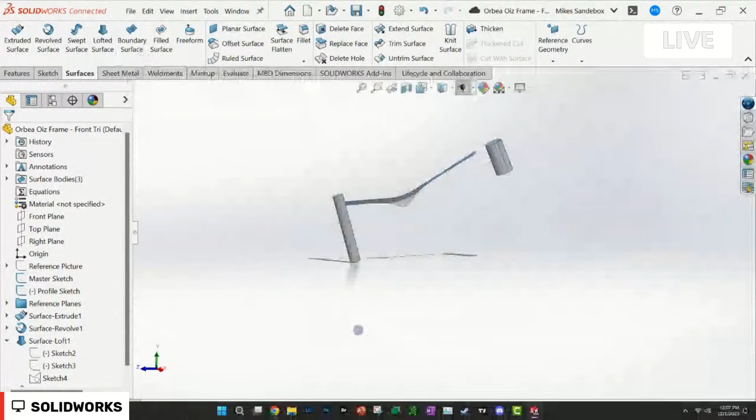Now, fast forward - that was, remember, 2017 when I started playing around with using SolidWorks to do bike design. And then recently - I'm not an X-shape guy, and I should be because I love surfacing, but we have people on our team. Andy Barnes, who's like the best X-shape user in the world.

I hope Andy's watching. And then Jordan's not too bad, and Gian's really good too.

So I've been playing with the new X-shape tools, and the reason I hadn't done it at this point was we didn't have good ways to merge multiple bodies, and you need that, and now they have it. The other reason I want to show this is because this is like the new workflow.

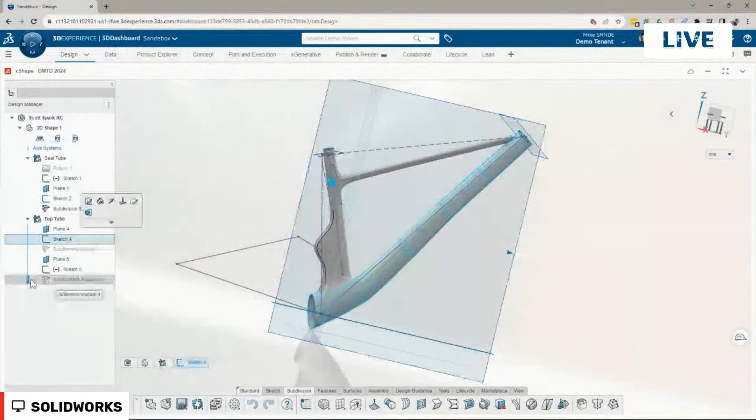Sorry, I'm really bad at navigating in here, but essentially what I've done is create a sketch like this, just a basic profile sketch, and then extrude that out - that's just an extrusion all the way out, and then that turns into a sub-D body. So just like we did in SolidWorks, where I create a series of extrusions, swept surfaces, or lofted surfaces. What X-shape now allows you to do - same workflow, but then once it's created, I can push and pull it.

The other cool thing it does is once I get to the hard part in X-shape, I can just say connect that face to this face. I would demo that, but I wasn't really planning on doing that, and I don't remember how I got here. This thing took me like 10 minutes to get to here. And this is a different bike.

Super cool. So another way to play with it, if you have access to it - there we go. So starting to just kind of mess around with different workflows. But yeah, these transitions, like literally, this is just an extruded sketch, and then I just said, hey, combine those two.

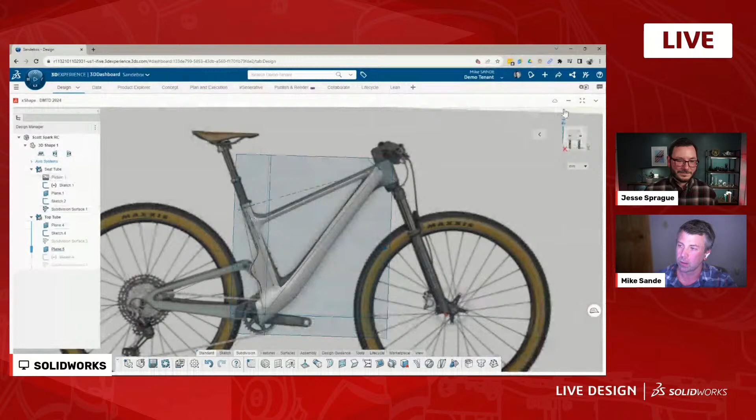Sorry, I thought I'd go a little further, but it's complicated. Yeah, it's not a one hour design, as I hope you all appreciate. Absolutely, that was super fun.